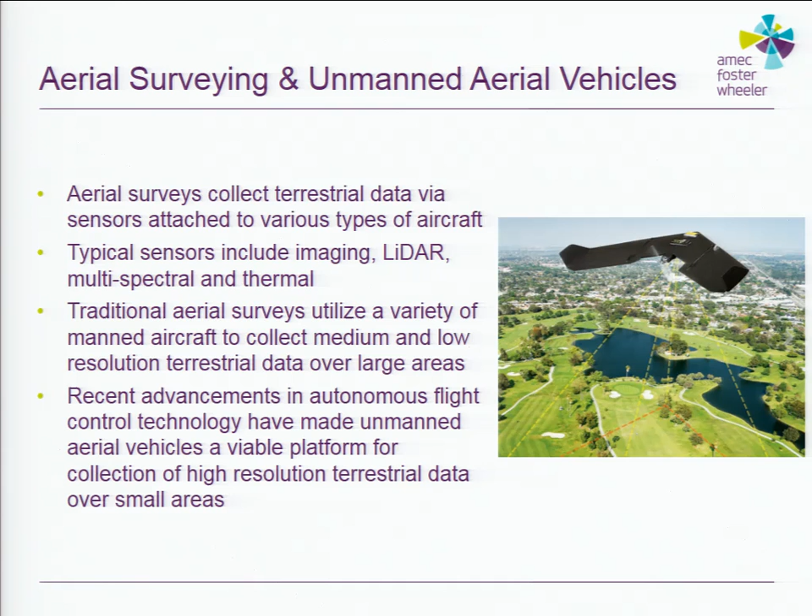And I'm going to focus mostly on the aerial aspect of it today. I could talk for days if we want to go into ROVs and maritime and everything else that's possible with an unmanned system. The technology today has really produced ways that we can have broader commercial application. It's democratizing how many people can use the technology. Prices are coming down for sensors and aircraft, and it's really making it where a lot of different people can use the technology in very different ways.

Beginner Drone 101—I won't spend a lot of time on this, but we really have two main categories. I wanted to focus on what the difference in capabilities are from an acquisition standpoint. Obviously, we have fixed wing and we have multi-rotor.

Really, when we're planning missions and looking at what we're going to use, sensor payloads on both rotary and fixed wing UAVs are almost equal now. The only real difference is a lot of times you'll find some multi-rotors have a heavier lift capability, while a fixed wing is a lighter weight aircraft. That's why it can stay up in the air for 45 minutes to an hour or more, so the sensors tend to be a little bit smaller. Some of your heavier, big multi-rotors can lift 10, 12 kilos or even more and still stay within that 55-pound rule that the FAA governs as a small UAS.

Whenever we're planning missions, determining which UAV type we're going to use is really just basically we look at the characteristics of the flight. If we have to collect a very large area, we're typically going to go towards the fixed wing application. A smaller area, we tend to lean towards a multi-rotor aspect, and also depending on the characteristics of that acquisition area.

If we have a strict boundary, for instance if we're flying in a park and there's roads on either side, even though it may be a large park, we're probably not going to use a fixed wing because you have to account for flying over people, which is not allowed under the FAA rules without an exemption. If I don't have a special exemption for that area, a fixed wing solution may not be the best thing to use because you have to account for the turnaround zones where the drone has to go out and collect outside the area to come around and do the next flight path.

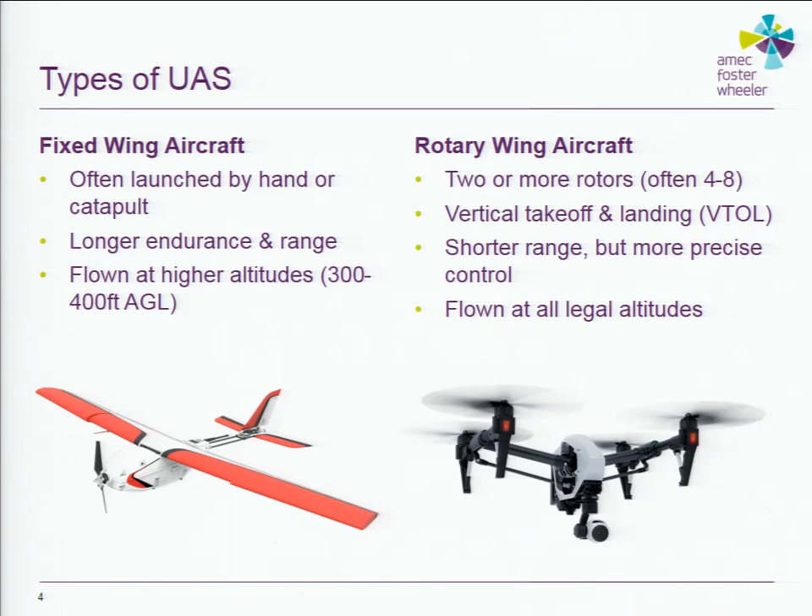Before I get into the example, I wanted to talk a little bit about a broad, 1,000-foot overview of some of the different applications of UAS that we've been using and what we're seeing in the industry. Obviously, from a commercial perspective, we're an engineering design firm, so anything to do with infrastructure and building inspections is an automatic win with the drone industry.

We send people up to inspect towers, water towers, high up infrastructure, bridges. That presents a significant risk to a human being. Even though we have lots of safety equipment and are always safety conscious, there's always going to be that risk. And it's going to take a long time—you have to send somebody climbing up a 400-foot water tower, and it takes time for them to get up there and do everything they need to do. These things can be done much more efficiently, quickly, and safely with an unmanned application.

Obviously, we've talked about orthophotography. We've seen the true applications of that in the first presentation, how detailed you can really get with ortho photos and aerial imaging with a UAV. We're typically running our orthos somewhere around the 2 to 5 centimeter pixel resolution range, again depending on what camera we use and how high we fly. But you can see license plates when it gets down—not that we were using it to spy on license plates, but that's how detailed you can get with imagery that fine.

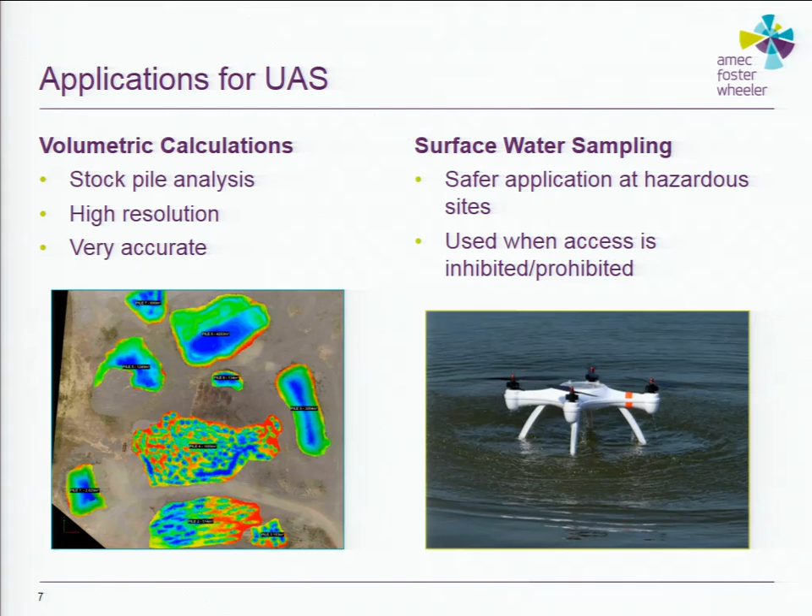So we were actually approached by one of our clients to start researching a way to efficiently collect water samples with a UAV. This isn't a specific picture of one of those, but it's a very similar aspect of what we're doing. It really shows that your imagination is as far as you can go with this technology. There really is no limit to what you can do. Everything can be done safely, and most things at least can be done legally. So you just need to check with regulations, check what you're doing, to make sure you're doing everything properly.

We also have LiDAR and photogrammetry, which we've discussed in all the previous presentations in this session. LiDAR is becoming much more widely available through UAVs. The sensor technology is starting to get smaller, lighter. There are several UAVs that can hold a LiDAR sensor. We partner with a company that does have that capability. We're looking now at 50 to 100 points per square meter, 120 in some cases where we have good overlap for this LiDAR. So you're looking at extremely dense LiDAR from the air, collected somewhere around 180 to 200 feet up. You can really get into some very detailed data sets with this.

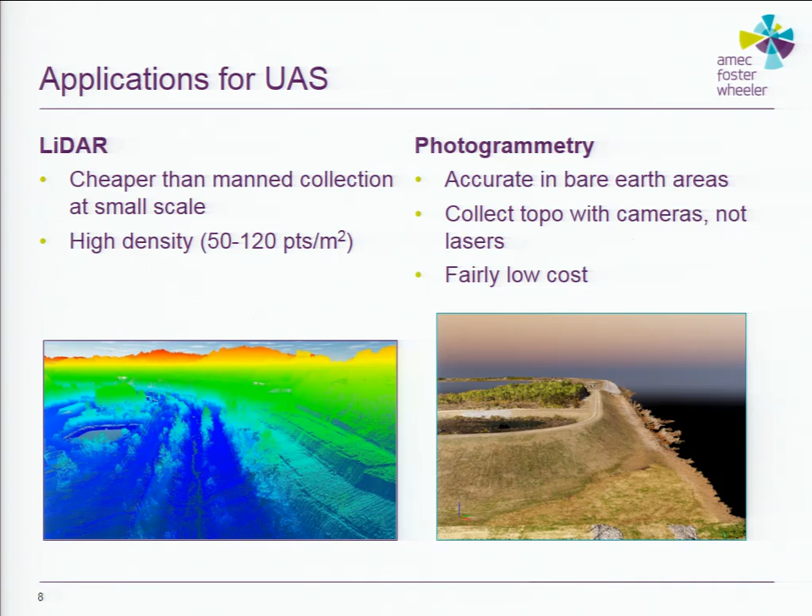And we've, of course, talked about photogrammetry, which is where I wanted to get into my case study. What I wanted to really focus on was how we can use UAVs, unmanned technology, in conjunction with existing technology to produce faster, more efficient, and much better data.

So what we did was a case study where we went down to Collier County, which is Naples, Florida. We partnered with Autodesk and a local firm here out of Salisbury called Sane Technology. We went down and all kind of descended on this wastewater treatment plant at the request of the county to do a proof of concept on their wastewater facility in Naples. What we were going to do is they wanted to find a way to produce a digital as-built without having to send surveyors and measurers out there to spend a lot of time collecting all the measurements and doing everything in the field, which is the traditional way. They wanted to see if there's a way we can use unmanned technology to really advance how this is done.

So a little bit of a brief on the mission area. This was at the wastewater treatment facility in Naples, Florida. We collected over the course of 2 days. This was in July of last year.

Even though it was in South Florida, there were actually no airspace issues here, which is one of the things we always look at when we start a mission—what are the airspace requirements and when we need special permission to fly there from the FAA. The picture on the right is the Google image of the area. It's about 10 acres grand total, lots of above ground tanks and facilities. So really good chance to go and collect some good data at these sites.

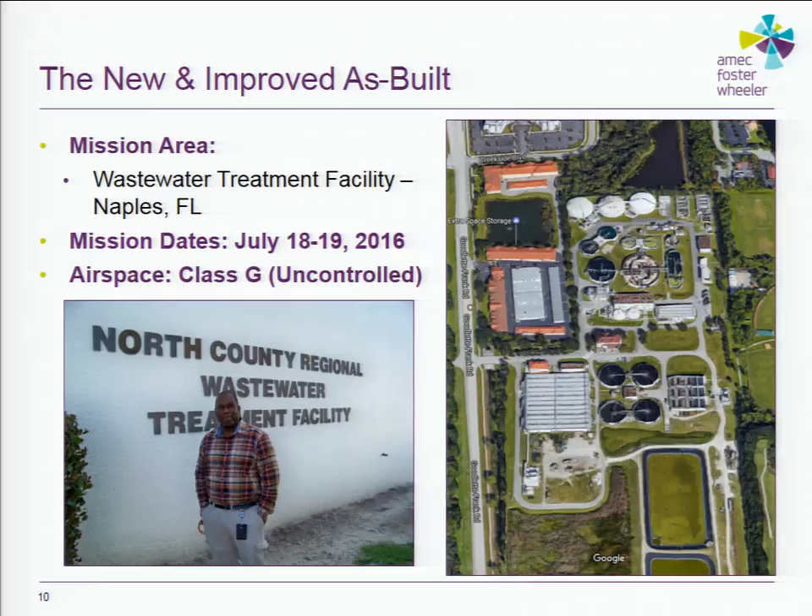What we used—we had a variety of different equipment. We actually used 2 separate UAVs on site. We had 2 DJI drones: one Inspire 1 Pro with the Micro 4/3 camera, and a Phantom 3 Pro with a smaller sensor, which we used for a higher level overview, whereas we used the Inspire with its larger sensor to collect a lot more detail around the edges and tops of the buildings.

We also coupled that with a traditional terrestrial LiDAR scanner. One of the things we were trying to do was collect the building in an accurate 3D sense. Traditionally, when doing photogrammetry of large areas, you do structure-from-motion collection using a top-down or slightly oblique approach with the UAV. Because of the level of detail on these buildings—lots of pipes, lots of structural details—taking photos alone was not going to be enough. We recognized from the beginning that certain things were not going to be captured from that initial photo; you're going to have trouble getting in behind things, and you won't get all the detail needed to complete a digital as-built. So we brought in that laser scanner to augment the photos and the photogrammetric approach from the UAVs.

We also brought out our survey crews from South Florida to do the ground control and validation. We collected for a day and a half, and over that time we collected just shy of 1,100 photos for this one particular structure I'm going to show you. We did 51 separate laser scans—an absolute crapload of data. We ended up with about 569 million data points, basically painting every horizontal and vertical surface of these buildings. Coming from the aerial LiDAR world, working with companies doing large scale aerial collection, 569 million data points for me could be a county—but this is just a building we're dealing with. So the amount of data was just absolutely phenomenal.

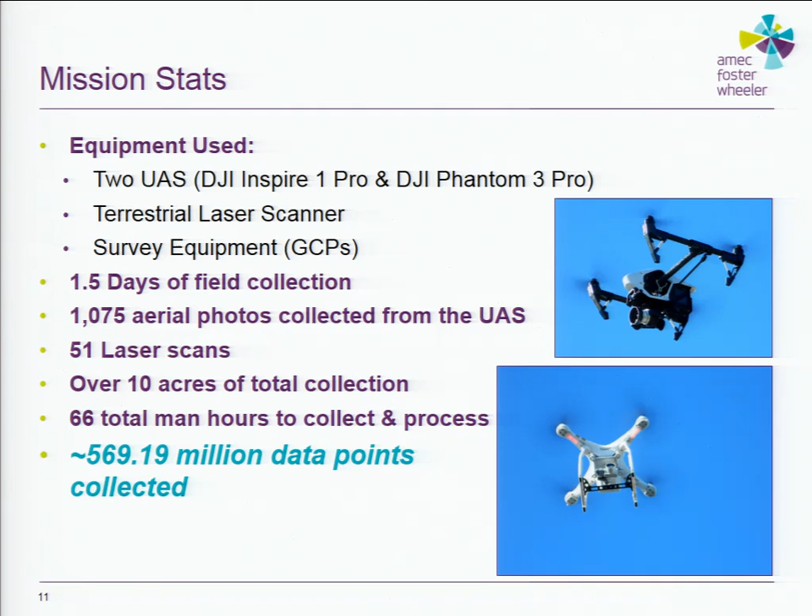One of the things that was special about this project was not just the technology used, but also how the photogrammetric data was collected. Traditionally, you'd pre-program your flight lines, set your overlap, fly a gridded mission, the drone comes back, lands, everybody goes home. We went through a much more detailed method and actually collected photogrammetric data manually. We had some amazing, highly skilled pilots come out and fly that day. They flew manual photos of the whole area, moving in an orbital manner, creating a dome of photos on either side and up and down each side of the building.

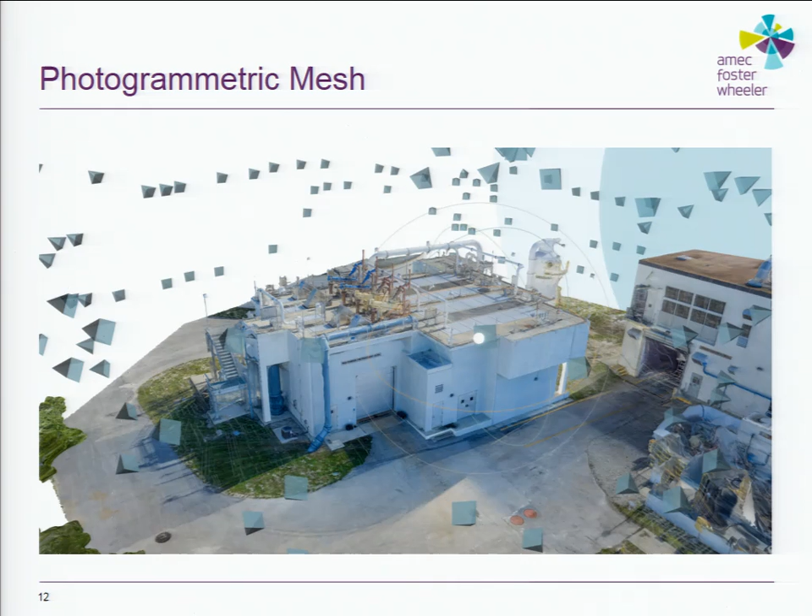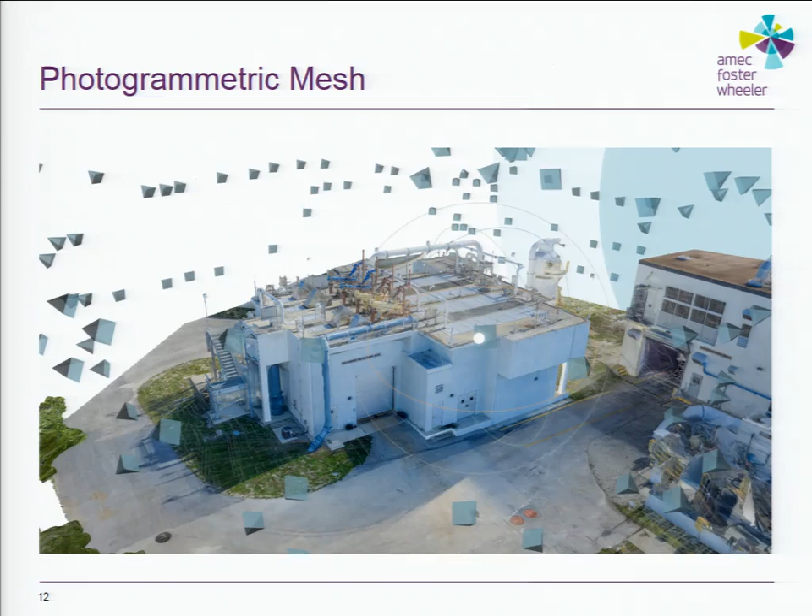This is a representation of where those photos were collected. You can see it's not a perfect grid line—these were all taken in a spiral sense. We started at the lower end, took photos, came back to the starting point, moved up a little, took more photos, and went all the way around. This one building took about an hour and a half of photo collection with both drones going at once. You can see the mesh that was created from that. Once we took this mesh and coupled it with all the laser scans, we ended up with this final product, which, for those of you in the front of the room, you can see is not a photograph.

For the folks in the back of the room, this is not a photograph. This is the actual 3D color model with the RGB values from the overall ortho stitched onto it. This is what is possible with UAV technology. This is not LiDAR - well, it is LiDAR from the ground, but this is what is truly possible when you get into high detail photogrammetric collection.

We took the ground control points, which were shot both on the ground and at certain points on the buildings, because we wanted to make sure we stitched this down and nailed it down to every surface on all three axes. So we put some ground control points and shot values on the actual structure itself. We made sure we hit some of the landmark stuff. So some of these, like the sign on the building, we knew exactly how wide that sign was from the building plans. We knew how big the doors were. So we shot ground control points in areas where we knew we could go back and validate it.

Once we did the final validation, our surveyors took a look at it. We ended up with 1.6 centimeters as our average accuracy of this structure, which is, to me, amazing. This really validated to me and to several other folks that if you take the time to really plan out something and do it correctly, you can get extremely accurate results from a combination of UAV and laser scans.

Typically, when we're doing photogrammetry from just a drone by itself, I personally would shy away from areas with any kind of vegetation, especially if I'm trying to do some kind of terrain adjustment, because that vegetation is going to skew it. I tend to go for bare earth, bare dirt, bare rock, where we've seen in previous presentations that it's a lot more accurate because you're getting points directly on the ground - there's not a lot of distortion.

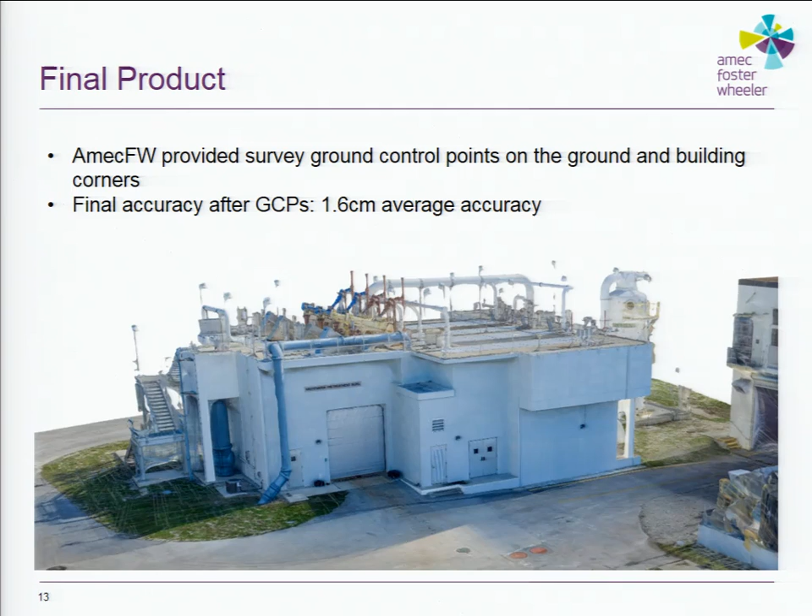We did eventually go back. We had enough data to collect the entire wastewater facility. I don't have that up to show because honestly the data was just too big and my computer acted like it was going to catch fire when I tried to show it, which is something else you have to take into account. We did have a few special considerations, things we had to look out for.

Obviously, weather being the biggest factor. This was South Florida in the middle of summer, so it could be sunny and beautiful one minute, and the next minute you're ducking for cover because you almost got struck by lightning. So we had to be very cognizant of the weather.

Airspace was an issue - fortunately for us, it wasn't. South Florida has a lot of controlled airspace, a lot of major airports, but we were good. We had to take into consideration the county personnel - they still had to do their jobs. They were non-participating personnel, so we had to make sure we had this area excluded to where we're not flying over any non-participating people, keeping it safe.

Also, we had to deal with wildlife. I'm sure some of you have seen YouTube videos of police in the Netherlands training hawks and birds of prey to take down drones. Well, this little guy was sitting right there watching us the whole time. So we had to keep in mind, make sure that we didn't disturb the osprey's nest. There were several other birds of prey nesting on site, so we wanted to make sure we stayed away from them because we really didn't want to explain to people why we had a dead osprey and a crashed drone. Just not a good idea.

And then we also had to make sure that we had the proper levels of overlap, since we were coupling together 2 different data collection sources with laser scanning and with photogrammetry from the UAV. We had to make sure that we had enough overlap in the initial collection to marry those together very accurately.

There's a lot of words on this slide - I'm not going to go through them all. Basically, what I wanted to sum up a little bit are what we've seen as the cost benefits of doing an unmanned collection effort versus a traditional method.

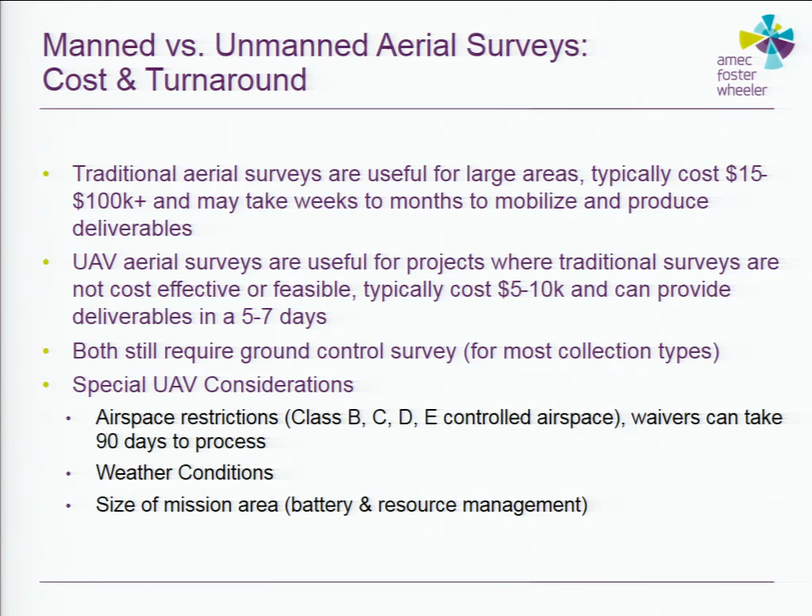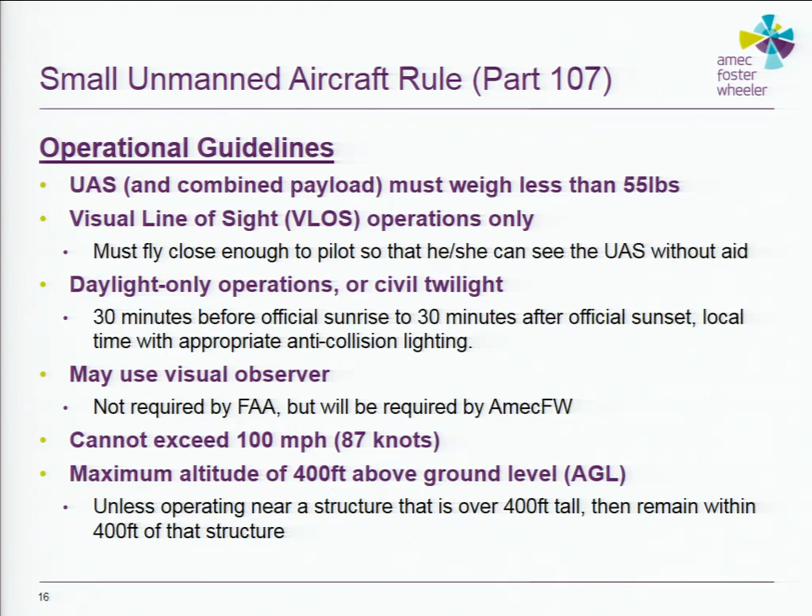Also with UAV, we have to consider airspace and any permissions needed with FAA regulations. For anyone who operates commercially, or has any desire to operate commercially, these are your rules: the FAA Part 107 rule. In a nutshell, don't fly within 5 miles of airports or within controlled airspace, stay under 400 feet, maintain line of sight. All of these things govern everything that we do. Now, you can have an exception to these if you prove to the FAA why you're going to operate safely. If you can't operate within these guidelines, you can apply for a waiver with the FAA to be exempted from some regulations, though not very many companies have successfully done that. The FAA is still in a state of trying to figure things out because, frankly, I think they're overwhelmed with the amount of drones that have entered the airspace in the last year.

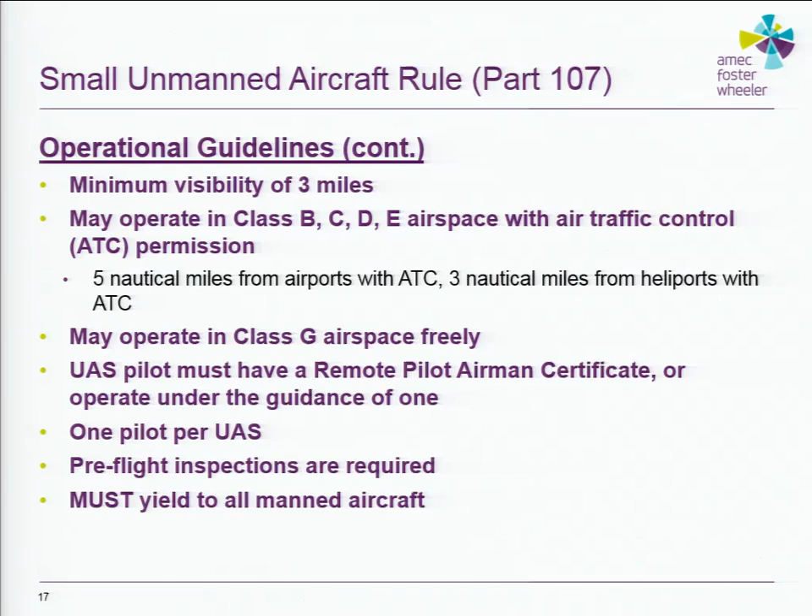I will end with what the last presentation ended with, because I do sit in that commercial acquisition world where we are selling data and selling services. So make friends with surveyors. Surveyors are our friends. They've always been our friends, and they always will be our friends. As was mentioned before, NC law does require a survey seal for any data collected that is considered measured.

So ortho photos, topo, photogrammetry, LiDAR, anything that you can derive a measurement from is going to require a survey seal. So what we do from the beginning of every project is engage our surveyors from the start to make sure they understand the scope of the project, how it's going to be processed, and what the final deliverables are going to be, because they're ultimately going to be the ones signing off on it and having to seal the data. We make sure we engage them from day one, and I encourage everyone in the room who is working commercially, or has any aspirations for working commercially, to do the same.

Make friends with a surveyor. Either hire one, use the one you've got, or look to subcontract to a surveyor to make sure that all of your products are sealed and validated as required by the law. And this is any state, truthfully. North Carolina is a little bit more strict with that than other states, but I would still argue that regardless, you need to engage a surveyor to make sure that your products are accurate and validated.

And with that, I'll take questions.